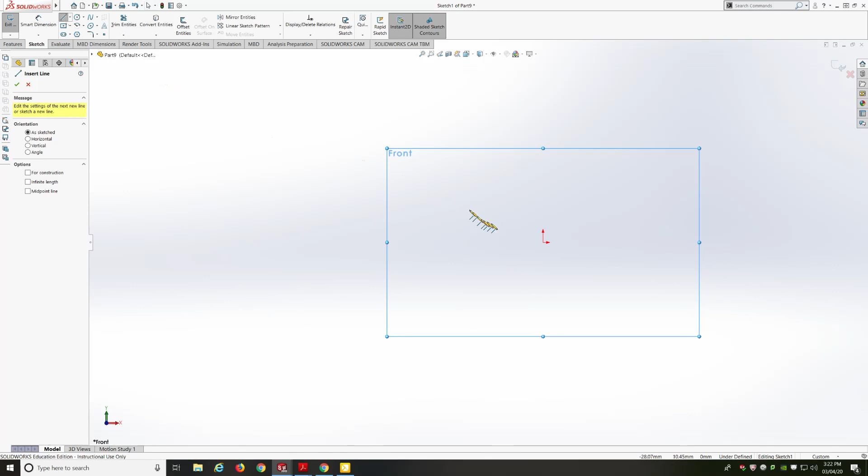All right, so I'm going to draw a line from the origin out to the side, and of course it was bound to happen. I got to change to inch pound seconds, which kicks me out of sketch. Go back into edit sketch. All right, and this first one I'm going to smart dimension at 1.75. Okay.

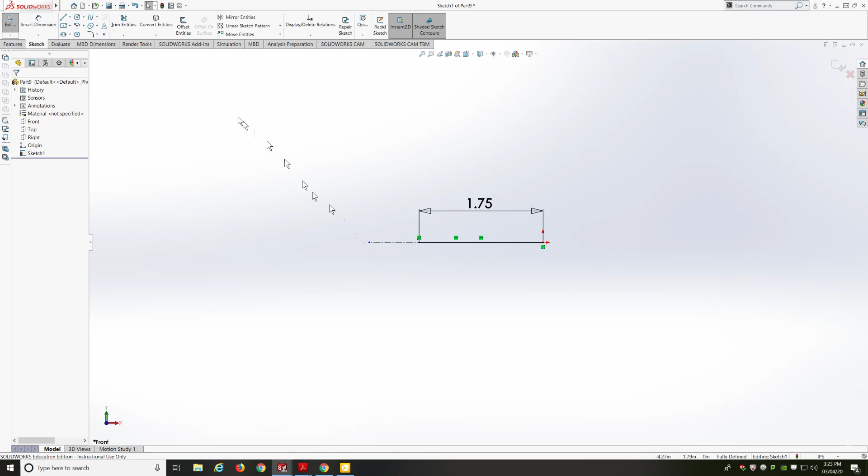Then I'm going to use a center line, and I'm going to start from the origin to draw a center line and smart dimension that center line at 2.20. And that's going to give me one center point. So I'm going to start at the center and go to the other end of the line. That's going to give me the first part of that leg, that sweep.

Okay. Then another center line is going to go from the origin, hit escape after placing that. I'm going to smart dimension this at 3.450. And that's going to give me a center point for another circle. And this one starts at that end point, and it's going to end at the 1.75.

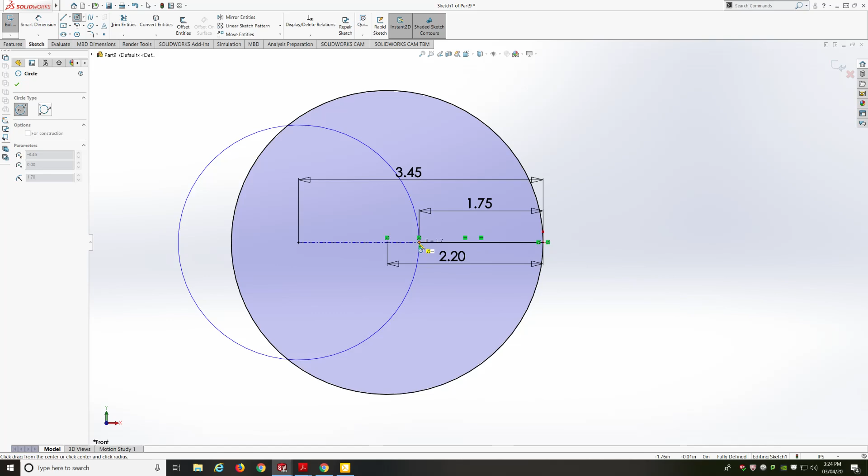All right, so that kind of gives me the basis for creating this moon shape now, which I have to trim out. So I'm going to go to Trim Entities, and I'm going to trim across that. I'm going to trim across the top. And what that leaves me is with this kind of moon shape.

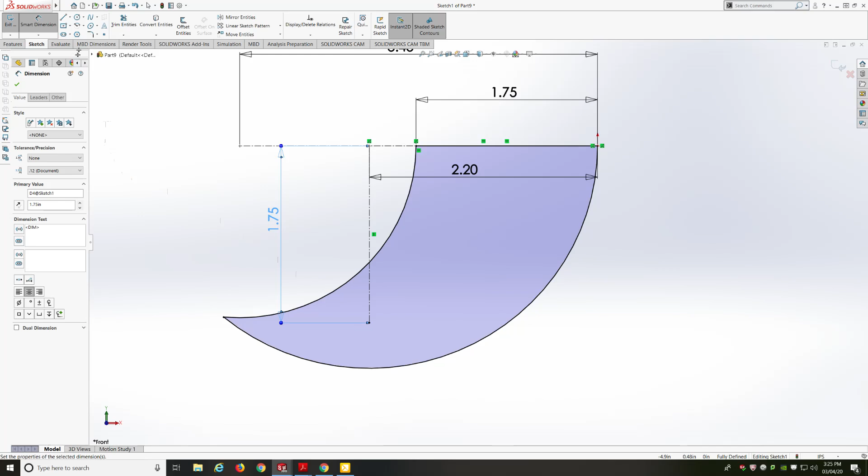All right, the moon shape, got a couple things here. I'm going to drop another center line from the 2.20. Make that vertical. Hit escape, and I'm going to smart dimension that 1.750. Okay, so this marks the center point of the hole that's going to be there. So we might as well put it in. And I'm going to smart dimension that as 1/2 inch.

Okay, and then the next part is getting a hole from this center point to basically be trying to touch this edge and this edge. And you can do that with a regular circle, but there's also another way with using the perimeter circle, which we haven't really used before. But a perimeter circle, you're going to touch the edges. All right, so I'm going to touch this top edge, click and drag. I'm going to touch the bottom edge.

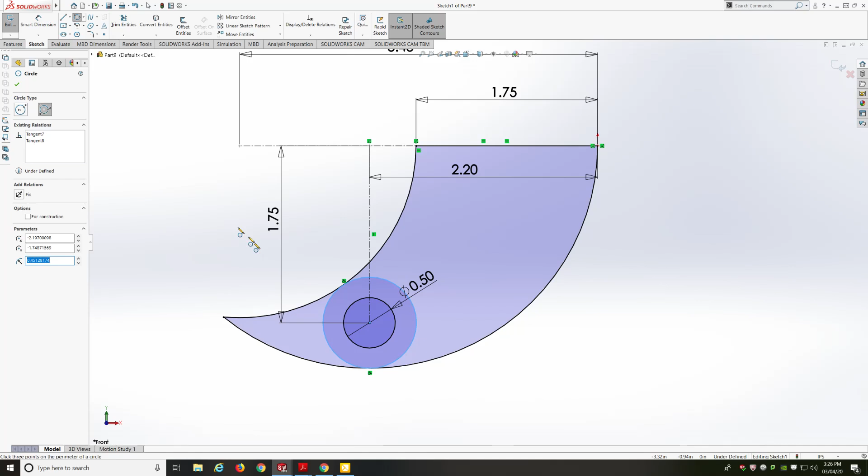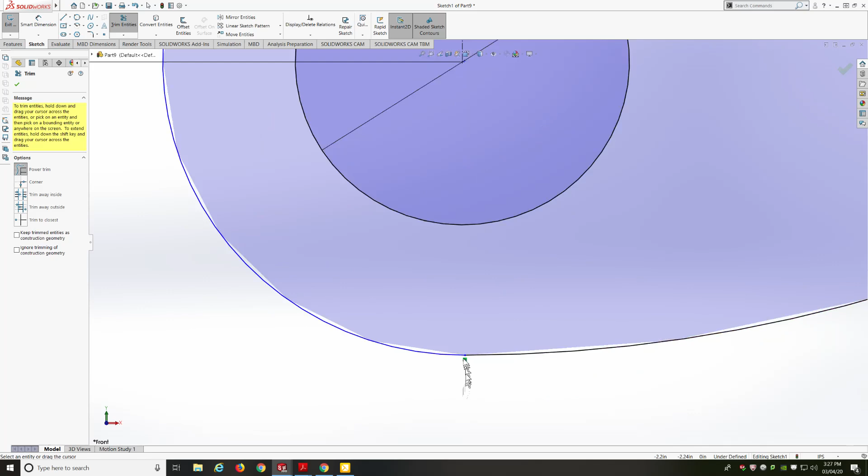And then once I do that, I'm going to basically try to connect it with the center right there and left click. And it gives me tangent point, tangent point. So from there, I'm going to trim entities and then trim the back side of that circle, making sure, this is where the big mistake comes in. You got to make sure that you don't have any overlapping points, and sometimes you have to zoom in really, really close to make sure that there is no overlap. Okay, so I'm going to hit F for fit.

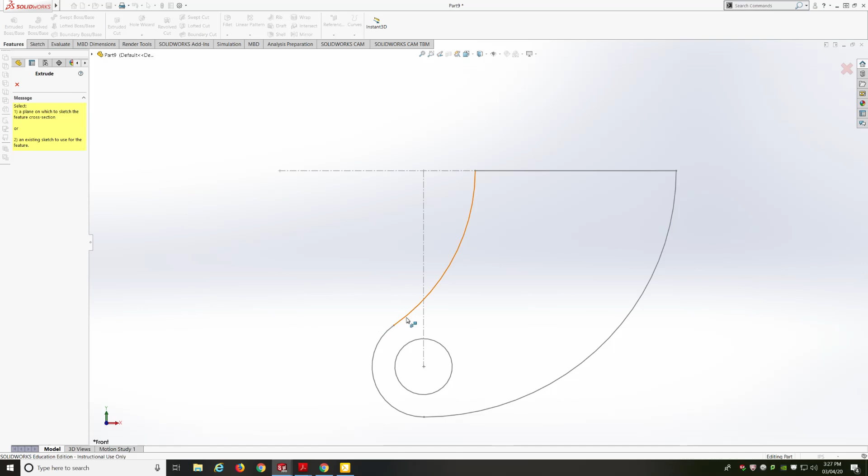That's my side plate. And I'm going to green check and exit the sketch. And I'm going to extrude boss base. And I'm going to select the sketch. And for whatever reason, it's not liking the entire contour. So I'm going to exit back. So try one more time. Left click, extrude boss. There we go. And what's my thickness? Thickness is 0.120.

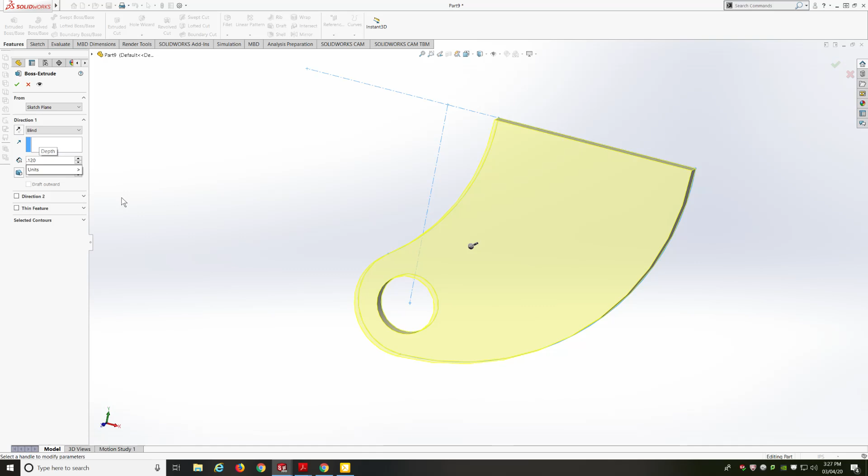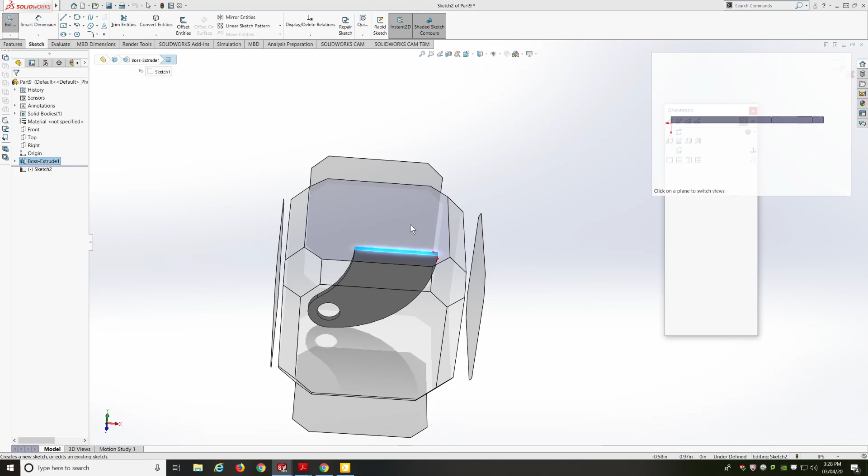Green check. Okay, from here, I'm going to enter the holes, which are not threaded. All right, but I have to select that top face and start a new sketch. I'm going to hit the space bar and, okay, I'm looking at this. I know that it flipped it around on me, so I'm just going to flip it back, get it close to where I need it. Space bar and normal to. There we go. So the hole is over here. The rest of my face is back here.

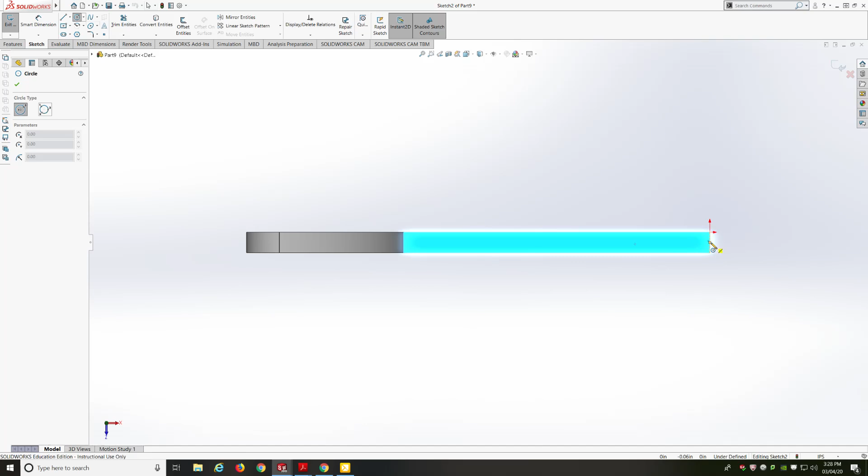I'm going to place 2 holes, making sure to choose the regular circle. I'm going to tag the midpoint to make sure that I stay in the middle. And I want to make sure that I keep that tracking line going. And here's going to be the same thing. I'm going to drop down and add relations. It already has arc 2 because that was already selected. I'm just going to left click on the other circle, make sure that they are equal. I smart dimension one of them. And we have 0.07 diameter.

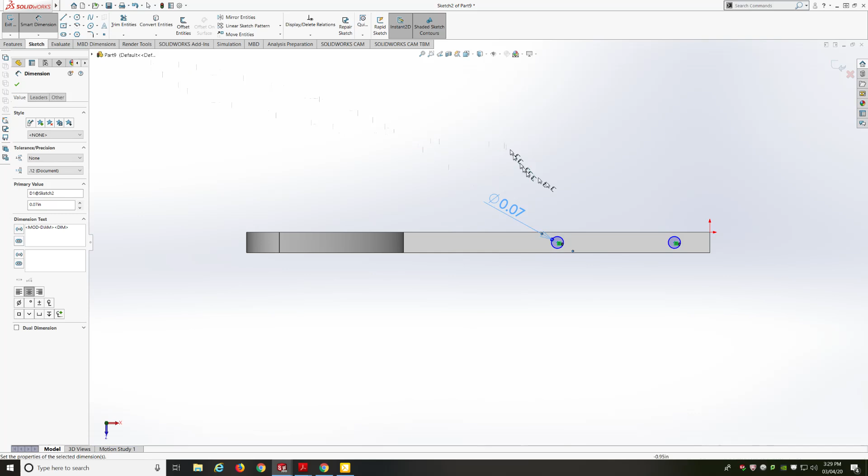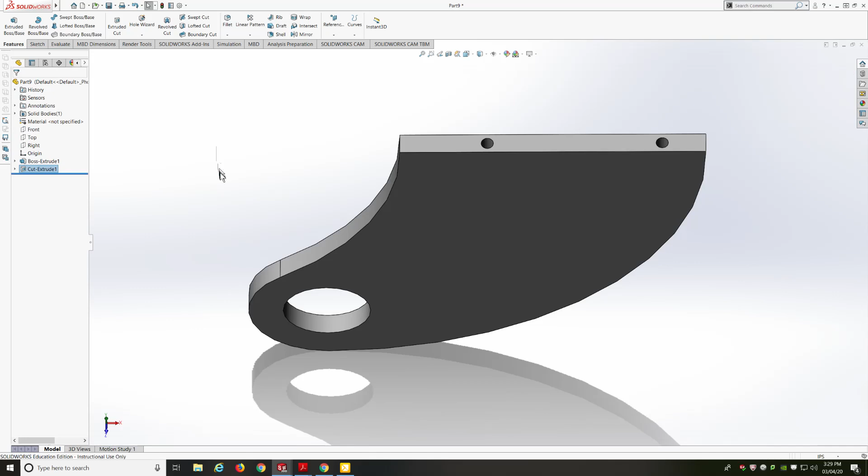And then it's about spacing. Spacing is 1/4 inch from the end, and then from circle to circle, 1 inch. Exit the sketch, extruded cut, and we're dropping down 0.125. Confirm the cut extrude, and that is the side plate. Save my file. That's part number 4. And save the side plate.